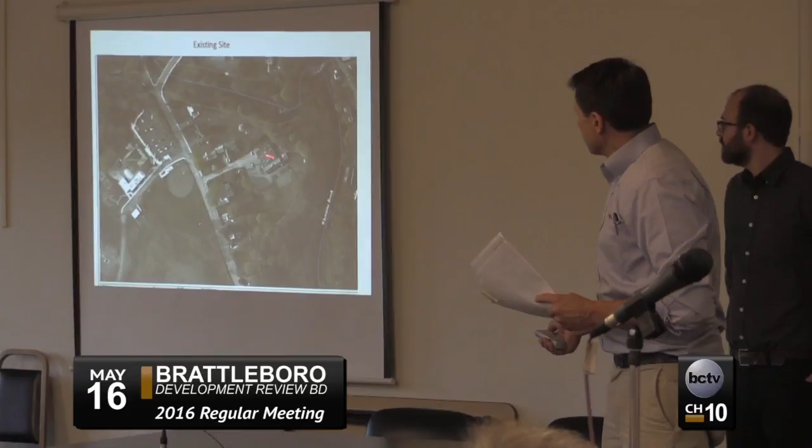I'll lead off with an overview of the project. This is taken from the Vermont Environmental Atlas, but basically we're out here on Guilford Street. This is Memorial Park over here, and the existing Winston Prouty site is here. I apologize for everyone that's trying to look through me here.

I'll mention a few elements that will come up later. For larger events or recitals, as part of their plan, they've been working on an agreement with the rec department to share the use of this parking, which is a secondary use. Their primary use is the music school, which is self-contained within their site. For these occasional events, as mentioned in the narrative, they have a history of making it work with a site that has basically no parking, so they're adept at structuring events, timing things, and working with groups in town.

Gotta point the right thing. There we go, one too many. There we go. By the end of the night I'll have this down, I do this all the time. It's a little lag here, perhaps my sensor is just in the wrong spot. Keeps you on your feet though.

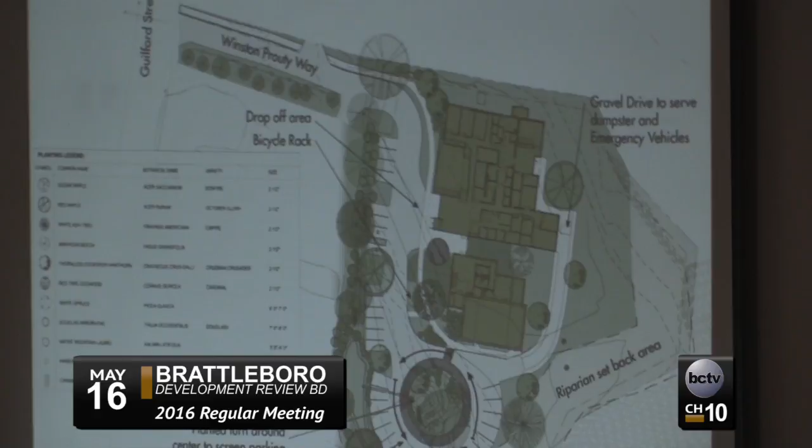Sorry, it just took me a little too long. Can you go back one? What's the number value on the bottom edge? That is 0.1 foot candles here. That was a strategy to maintain an even amount of lighting so there were no hot spots. So there's this one light that does push 0.1 foot candles over the property line towards the brook. Is it 0.1 because it's facing the other way? Yes. Where is the line where you get your first significant lighting, from the bottom? Can you show me with the laser pointer?

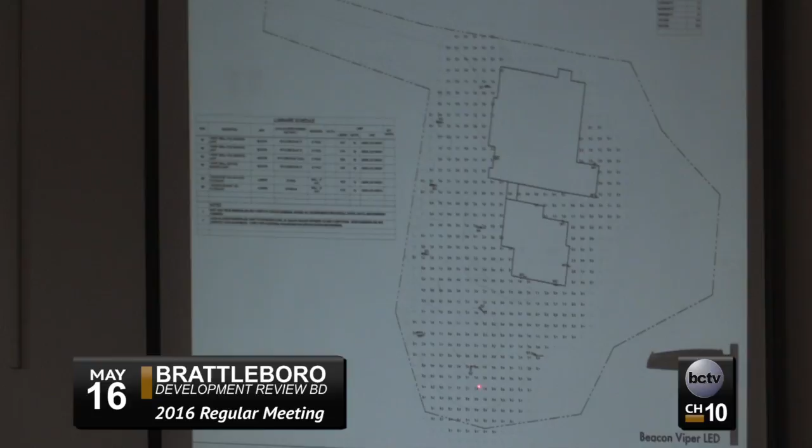The first significant point - not 0.1, but you get to essentially say 2.1 approximately right there, which is the end of the parking spaces themselves, about 18 feet from the edge.

And these are full cutoff 12-foot pole LED fixtures, so they don't wash anything up or out too far. Is it all 0.1 as you go up the left side as well, or the west side, right here?

Yeah, if you went up, this is primarily 0. Those where it turns black are 0.1s, and they're well within the property line. Otherwise, we've tried to keep it at 0 all the way along there and have no washout to the abutting properties.

On your packet too, I think the 11 by 17s are legible - I just couldn't find it quickly enough. He had gone on and I figured I ought to say something before I interrupted too far down the line. This is also to get everyone oriented, and then we'll go through each of the criteria, so we'll be talking about lighting again later.

Additionally, the lighting engineers were working off an older plan, and since then the cul-de-sac itself has actually moved further into the site, bringing the foot candles even further away from the property line.

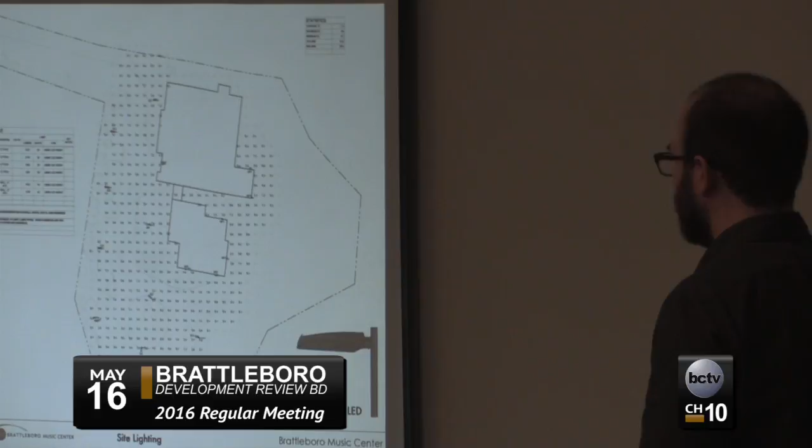So back to the planting plan. Again, the idea is to maintain all existing plantings that currently exist at the property line, and then do additional planting to enhance the buffer between the new parking and the building itself, providing both visual and sound buffers if there is any traveling sound.

I think that also reinforces not having the woody plants take over the current lawn - it's to maintain what is there, because there's a lot of support to keep that because they really enjoy it.

This current plan is the same as what was submitted, except the version you have showed some plantings in the stormwater pond, but the number is staying the same - we just shuffled them out of the pond.

So for the basic floor plan - as you can see in John's drawings, the addition to the existing building is to the west, entirely on the front of the existing building, and the addition is to the south of the current Winston Prouty building. Architecturally, we tried to keep the most sound-sensitive program in the new addition because the quality of construction is going to be much higher than what's currently there.

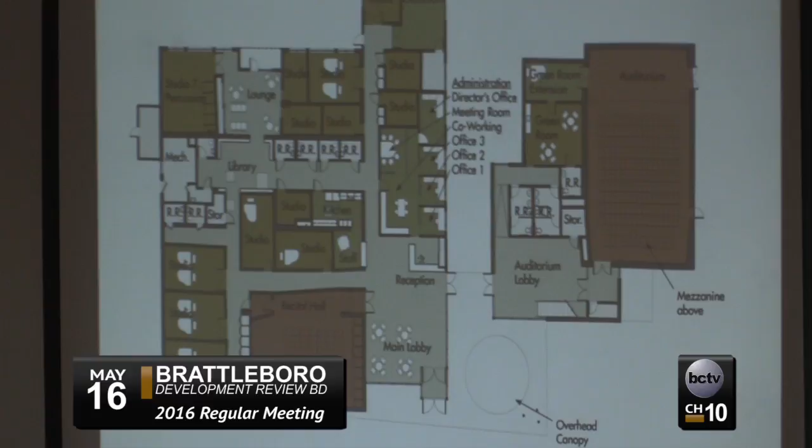I think that's sort of a little more here, I guess. So there is a mezzanine level - this is just showing that there is a double height volume towards the front of the recital auditorium that gains access to the mezzanine. And then you'll see the roof lines here.

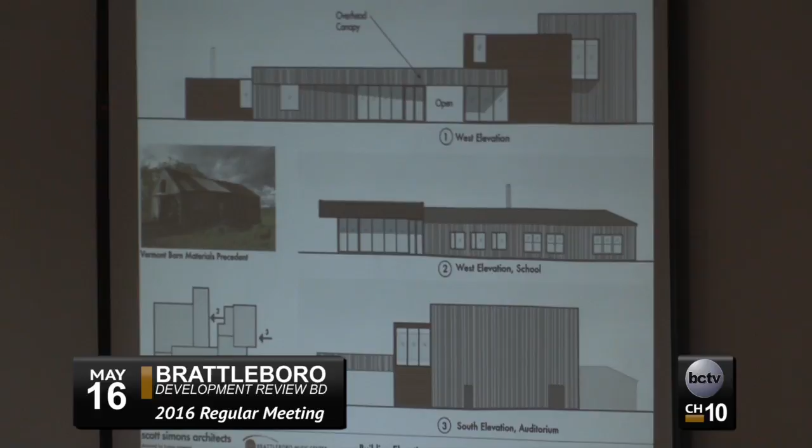As John will note, this will come into play pretty soon. Again, this is just to give you a sense of our project - we're going to look at this again in more detail once we are talking about compatibility and things, but just to give you a snapshot, here it is. This is the building, and this is the west elevation facing the parking area and the abutting property line and neighbors.

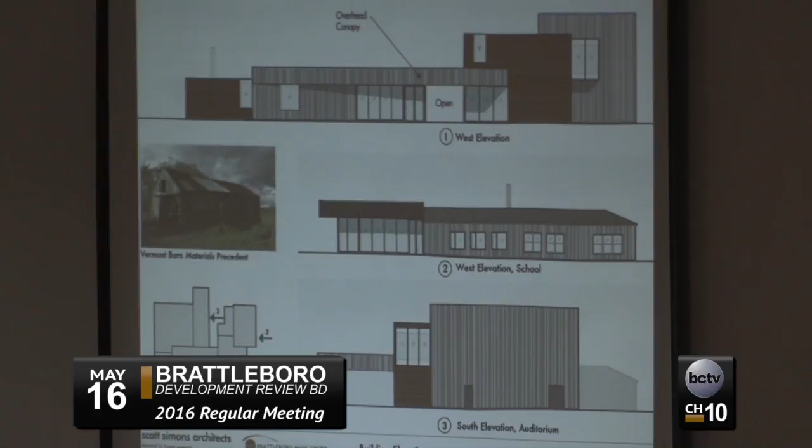The idea was really to take the formal simplicity of the typical barn and incorporate that into this new building, because this backyard program has connotations to old barns in the backyards of residential settings, acclimating the commercial program into it. So the idea is to use materials that reference the weather and change, that react to the Vermont environment—a rough sawn barn board and self-weathering metal siding, which play off each other to break down the scale of the buildings.

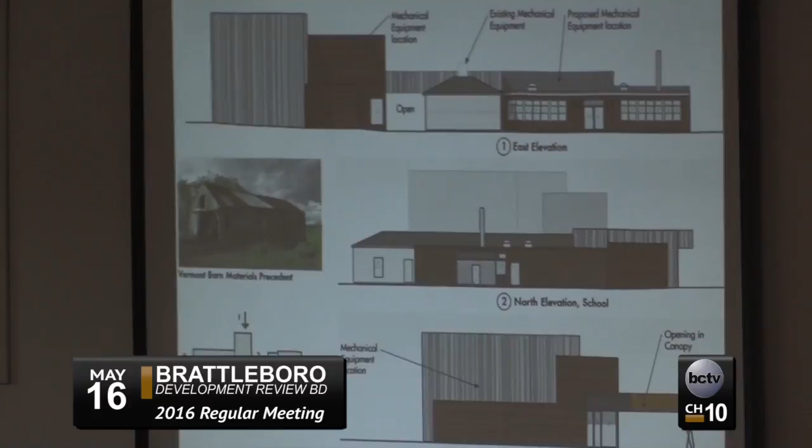So it doesn't seem large and ominous in the backyards. This is the east elevation, facing the Whetstone Brook. You'll see two notes of where mechanical equipment will be, which I'll come back to. With the new addition, there's going to be an increase in building height, which will help mask and enclose existing mechanical equipment and any future equipment located on the roofs.

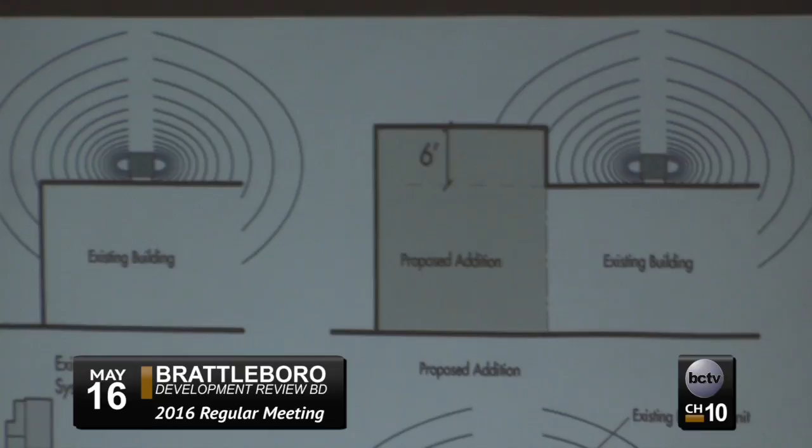Which leads me to my next part. So that was our introduction—this is our site, and this is our building that we're talking about. Before I walk through the specific site plan conditional use review criteria, there were a few points we thought we'd make right up front, because they may be the most interesting ones.

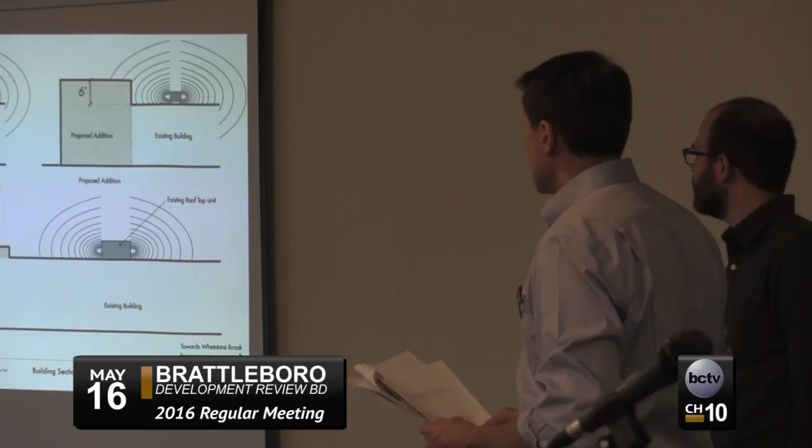One lead-off point came up when we met with the abutters—we stood in their kitchen and talked to folks—was a question about the noise associated with the HVAC system, the heat pumps and so forth that you're going to be using there. We couldn't answer it at that time because it was still in design, but Phil and his group have put together a presentation to talk directly to that. So you could go for it.

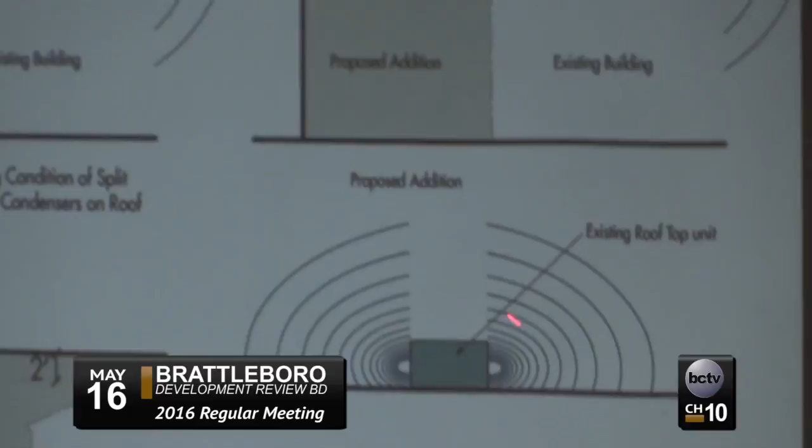So what currently exists at the Winston Prouty building is essentially rooftop units just plopped right on the existing brick building, which are these smaller units. Then on the newer wood-clad addition, there is one large unit right on the roof with no sound protection barrier or anything—it just falls off into the site.

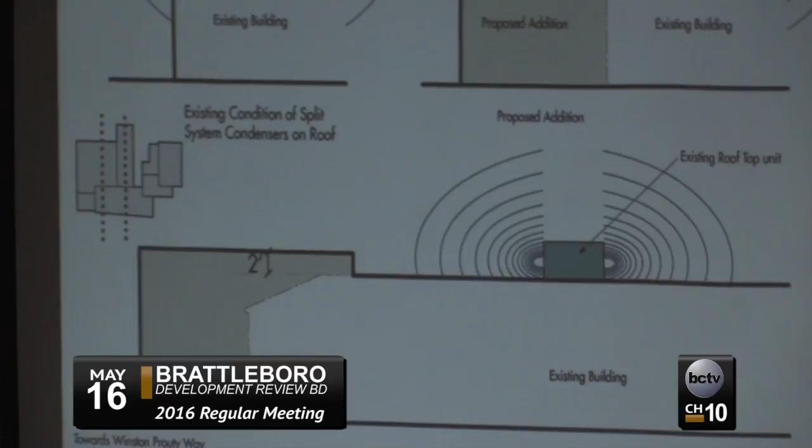With our proposed addition to the west, facing the property line and the abutting neighbors, the addition is proposed to be 6 feet taller than the existing building, which will shield what currently exists on site, as well as any future equipment on the roof. At the wood-clad building, which has larger existing equipment, it'll be slightly taller, not as large a barrier as at the existing brick building, but it'll provide a bit of a sound buffer, and more so a visual buffer so you don't see it.

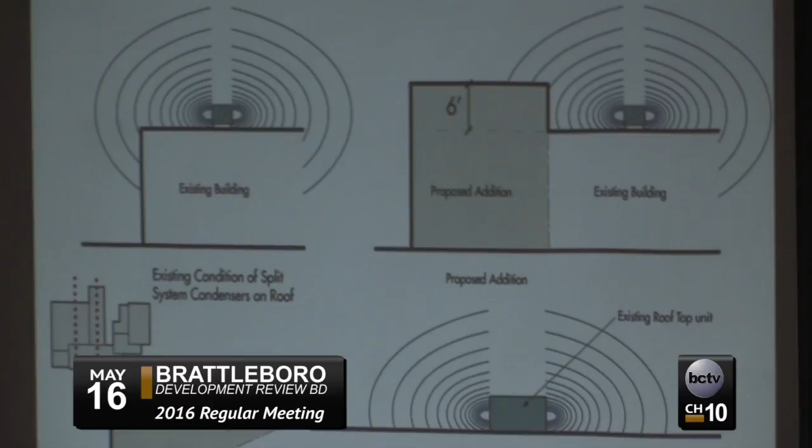Oh, sorry—are you saying there's going to be a screen from the south on the existing unit in the lower picture there? No, I was just depicting towards the west that we're building up and out with that one. Okay, what about to the south?

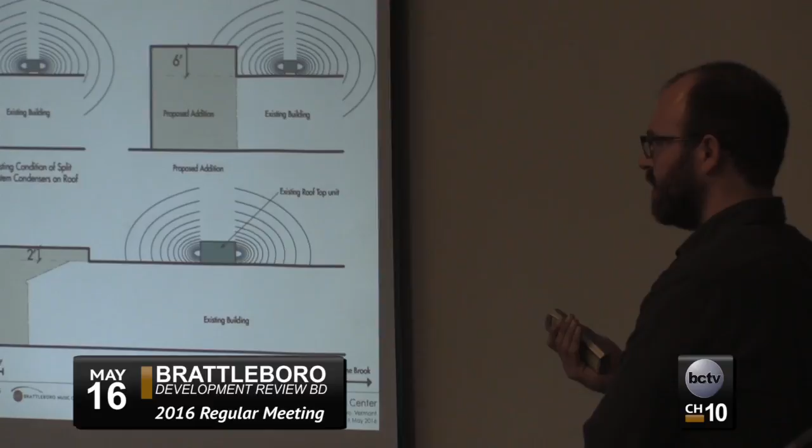To the south is the heavily vegetated hillside and the Whetstone Brook itself, which cancels out a lot of the sound from the existing units. I think during the neighborhood meeting they said there's currently no sound issue from the closest properties, but they were concerned that with the addition of the recital auditorium and the expansion, there'll be more mechanical equipment that'll add to or create unnecessary noise. Okay.

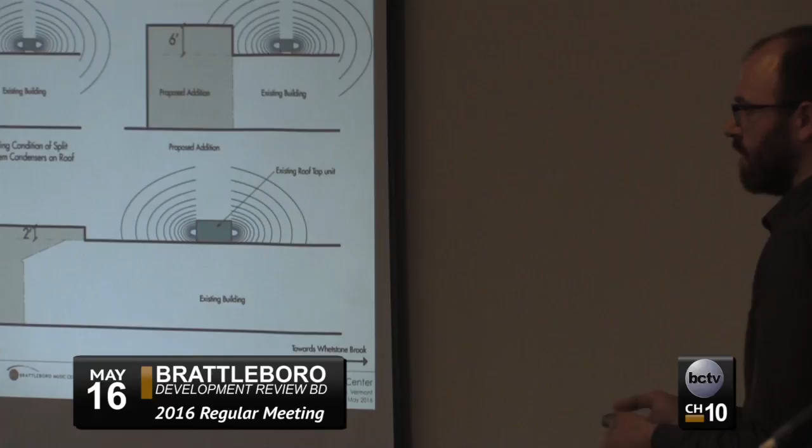At the recital auditorium, the general location is behind the double-height lobby that has the stairs to access the mezzanine, so there's a very large vertical 15-foot buffer between the mechanical equipment and the abutting properties to the west. There have also been discussions with our acoustical engineer about adding sound attenuation screens around this equipment to the south, since the first priority is to not let any sound into the auditorium itself.

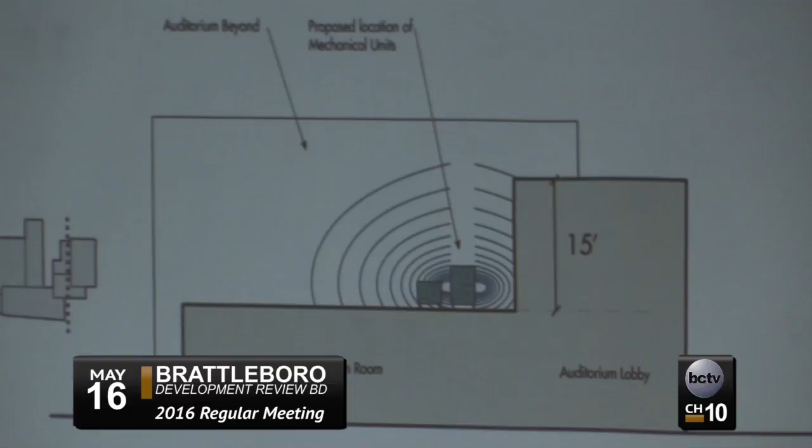So just to give some idea of what sort of equipment could be used, we just broke ground on a 32-bed dormitory, similar size, similar scale, similar need to separate and zone equipment. This is the sort of line we used, a split heat pump system.

You can't really read it, but I noted what the decibels are, and there's two levels. The sound coming from the equipment is louder during the winter than during the summer. Out of this whole range, we mapped out the worst case scenario, 58 decibels, measured in a soundproof box approximately 12 feet by 12 feet. There's a formula to figure out the degradation of decibels along a distance.

As a rough analysis, in the winter, the worst case scenario of 58 decibels at 87 feet, and then at 187 feet, which is the closest neighbor here, at the property line - this is uninterrupted, doesn't take into account any plantings or vertical buffer, just uninterrupted sound - you've got about 35 decibels at the property line, 28.4 at the closest abutting neighbor.

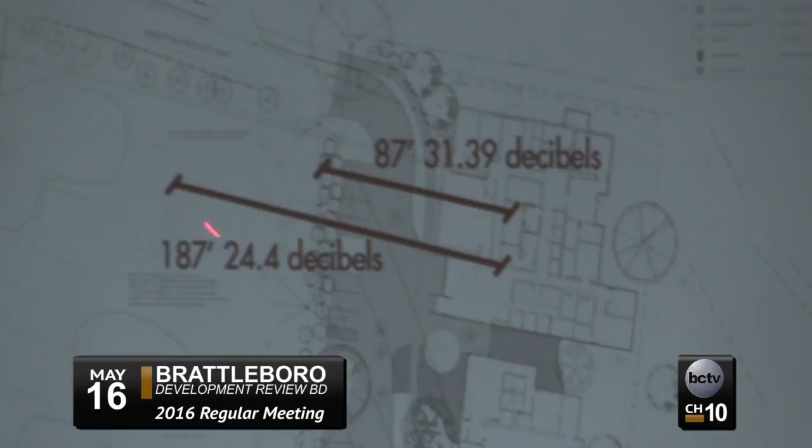During the summer, it decreases. They run quieter during the summer when they're cooling versus heating. Again, we're at uninterrupted 31.39 decibels at the property line, 24.4 decibels at the closest abutting neighbor.

Additionally, we've got the planting. Planting does help break down decibels as it passes through. We're not going to say there's going to be a 5 to 10% reduction, but we are using a mix of trees and shrubs as the visual buffer, which also aids in the acoustical buffer as well.

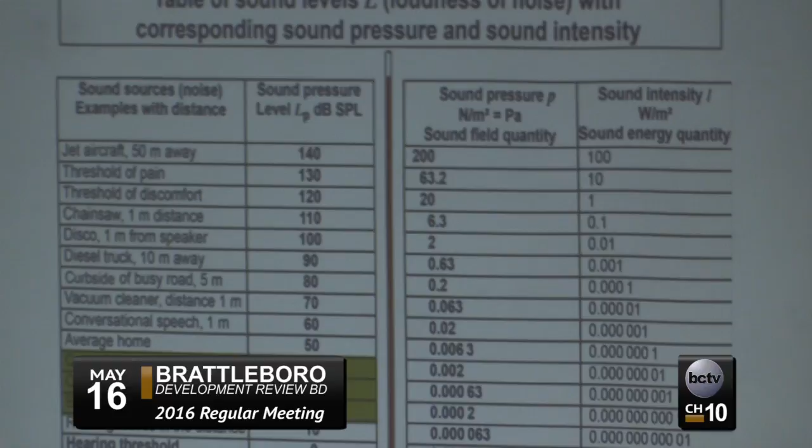So what does that mean? At the property line, when it's in the 30 decibel range, which is uninterrupted and doesn't take into account the vertical buffer of the building and the plantings, you're right around the sound level of a quiet bedroom at night, quieter than a library, a little bit louder than the background noise in a TV studio. It's very, very quiet, and that's before taking into account the vertical buffer and the plantings themselves.

Relating it to the regulations, in a residential neighborhood from 7 to 10, there's allowable 55 decibels, and then from 10 at night to 7 in the morning, allowable 45 decibels, measured 1 foot beyond the property line. So we're well below that. The idea is really using efficient equipment environmentally, which is good practice, also results in much quieter equipment because bearings are better, motors are better, there's less resistance, there's less vibration.

Okay, great. Thanks, Phil.

So I have just a couple more points, but just to wrap that up - our initial position was this is not an issue, this is modern equipment, modern technology, and so forth. But the BMC specifically asked that we address that because it was brought up, and the BMC is trying very hard to be sensitive and to be a good neighbor and wants to set that precedent now and plans to do it going forward. So that's why Phil took the time to go through that. Basically it's quiet, and the new stuff is good and it works, but by putting some numbers to it, that takes it to another level of demonstrating.

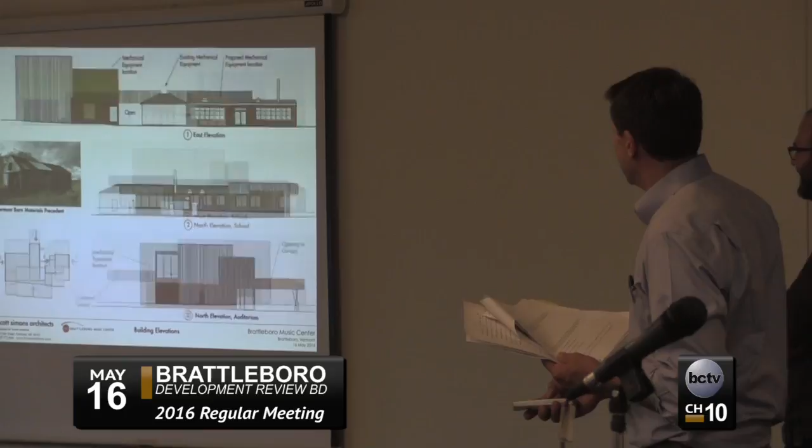Yeah, I guess we'll go back a little bit further. There it is. So again, just to restate before I start going through the criteria...

This is one area where the BMC's position is don't fix it if it ain't broke, kind of thing, in that there's good lawn, there's a playground area over here. Let me help you get oriented on this, just so when we start talking about that specifically.

Let's go back even further. So we are talking about this here, the 50-foot riparian area. I'm speaking to staff comments on the question of a 25-foot setback. This is the area in the picture you were just looking at with the playground. The existing playground was here. I was standing here when I took that picture, looking over this way. This is the edge where that fence is, and the playground area was here. So this is the strip that the BMC would like to remain lawn, and over here where they pull out the playground equipment, they would propose to return it to lawn as opposed to playground, as opposed to a requirement that it must grow up with 25 feet of woody brush.

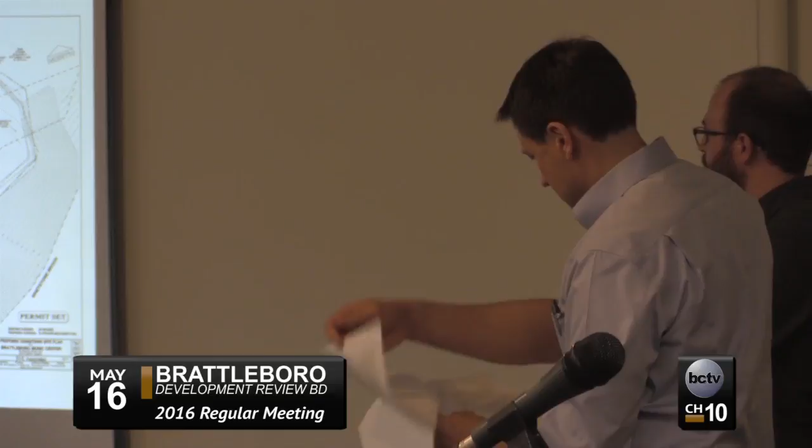Okay, let's see, that was the only thing. Yeah, no objections to the fire department's requirements there. I'll use yours, which I don't think I need to read through all those. And similarly, I don't think there was anything else in there that we saw that was in any way objectionable, other than just as I've mentioned a couple times, the question about the buffers, the only question mark that we saw from the staff comments.

Okay, so now that we've been going at it, it may be time to run through these criteria. I'm just coming right from figure 4.3 of the zoning, the development review criteria for, in this case, a shared site plan conditional use approval. It's site plan approval because we're building something, conditional use approval because the use, as was previously found, is a music school which was previously determined to be the same as a grammar school, which is a conditional use for this zoning district.

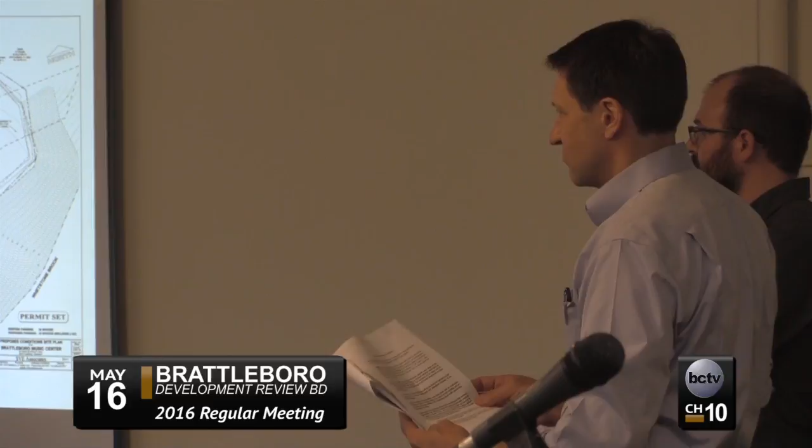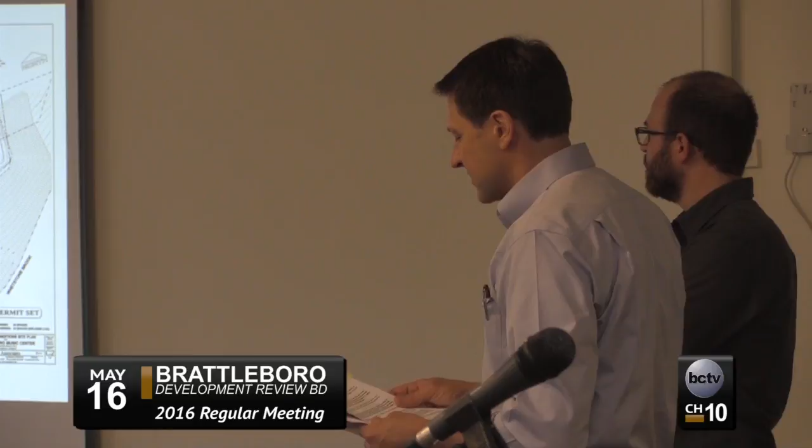Okay, so compatibility. As stated in the narrative, I'll try to be brief, but please ask if you'd like more detail. The proposed land development will not... well, I'll read what I wrote here. The residential neighborhood zone is comprised of high to moderate density residential neighborhoods; walkability and proximity to public transit, neighborhood stores, schools, parks, and other amenities are among the characteristics common to the residential zoning district. This project is fully consistent with the town plan's land use goals of reinforcing a compact, mixed-use development pattern that promotes walkability.

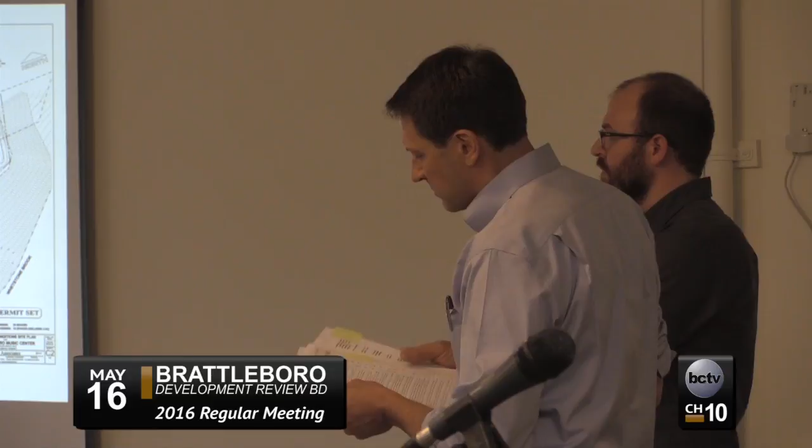Character of the area. The requirement is that the proposed land development will not alter the existing or planned character of the area as defined by the purpose of the applicable zoning district. As I just mentioned, and as Phil talked about when discussing the building, the building has been designed to fit with the character of the area. Maybe this is a moment where you can make sure that we cover that.

Another site plan at the end would have been helpful. Oops, let me just steal your thunder here. Oh, that's fine. Okay.

Maybe just again to address both compatibility and character of the area. Phil, if you want to take a moment to talk a little bit about how the building fits within the site.

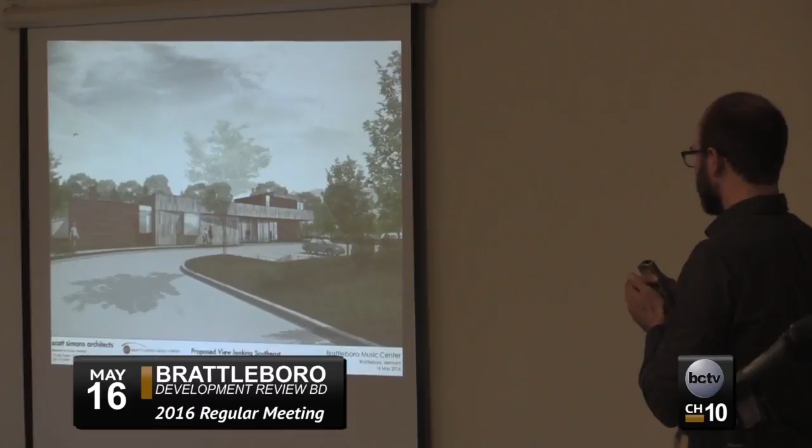So what we plan on doing is, here's the addition, and there's the taller portion of the recital hall, and that will screen all the existing equipment and any new equipment. You can see how the very simple forms of two distinct materials help break down the length and breadth of the facade, as well as help organize the site as far as where you enter the building, which is framed between the two larger weathering metal boxes and under the large canopy that frames the public entrance to both the auditorium and to the recital, the music school.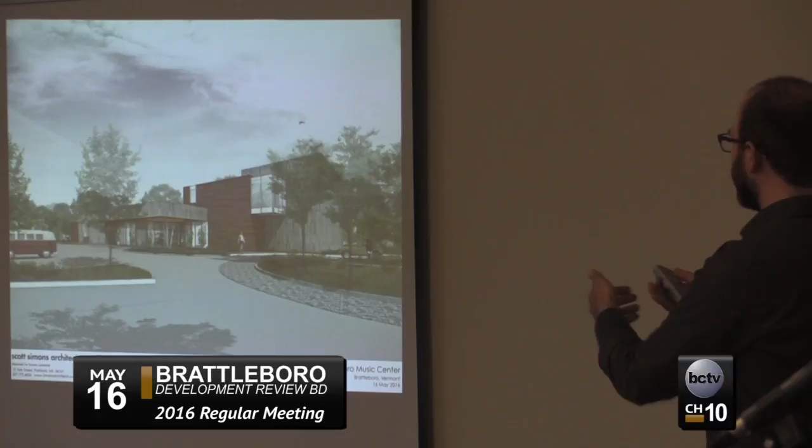And the auditorium with a double height volume that has access to the mezzanine level, as well as a double height lobby space. The strategy of bringing those spaces forward in front of the auditorium, and bringing the lobby areas in front of all the studios in the music school, helps buffer any internal noise happening during any recital or performance, having that space break the sound down.

Good, good. Okay, so again, a focused effort on fitting it into the neighborhood, and not just bringing something from outer space in here, but trying to look intelligently at what's there and what makes sense.

Yeah, actually the site plan really evolved through a good, close collaboration between both SVE and Scott Simons. We went back and forth trying to figure out the least impactful way to get emergency access and the appropriate number of parking spaces on this site without having excess impervious surfaces. And with the riparian buffer to the southeast, it really came down to fine tuning where the auditorium can be and where vehicle access can be. This was really, we felt, an exciting plan that evolved out of it.

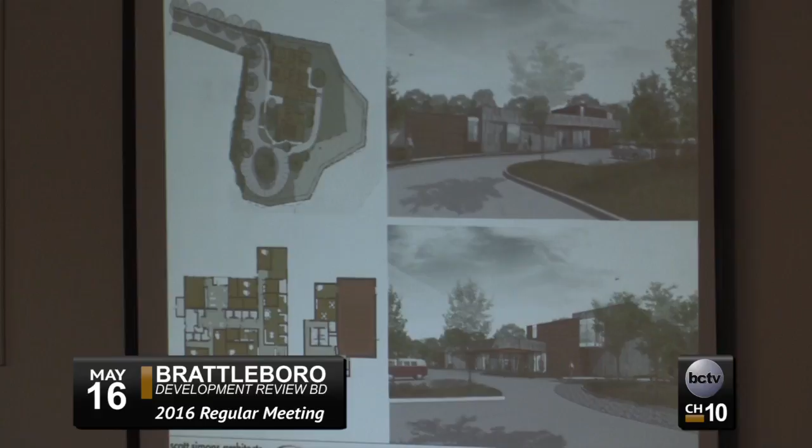Okay, so moving on to traffic, I'm going to skip back to something that shows the site plan. And you will get to see this apparently many times before we are done tonight. So there we have it. So, oops, one more time. Again, in terms of...

I'll blend traffic and vehicular access and circulation here. Of course, Guilford Street, cars come in, and it's two-way traffic through here, and then we have one-way through here with parking on the side broken up accordingly.

Okay, and then speaking again specifically to the traffic question, for the base case, and also a little more information on BMC and traffic and their operation: they have a busier period which tends to mirror the school year, September through June, and then a reduced and slightly changed program in the summertime.

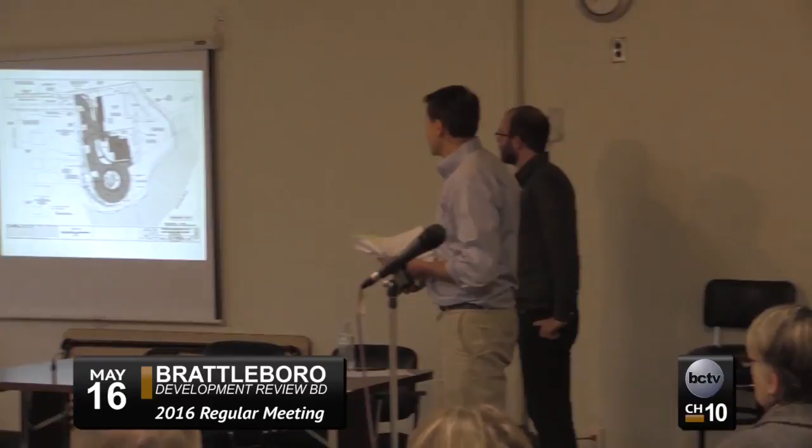Reverse that, 60 for the orchestra, 90 for the choir. Okay, I will reverse that then. 60 for the orchestra and 90 for the choir, plus or minus. And then for the chorale, 30 members.

But the point being that limited use at off-peak times, I guess, is the essential point. And why that they would go to all this effort if they needed a parking lot with 100 spaces, then they certainly would have directed us that way, hey, we need this.

But it seemed like the ideal opportunity to mesh with what the new zoning ordinance was trying to encourage folks to do, which was to utilize community resources at times when they're not getting used otherwise. And so that's why they have become very comfortable with 34 parking spaces.

And just a little more detail on that. That number was worked out in consultation with Brian. Basically, what we did there was consider the 225 seats for the auditorium as the controlling number to design around.

And per the zoning ordinance, the ratio for required minimum parking is 1 space per 6 seats. Yes, righto, I knew what I meant to say.

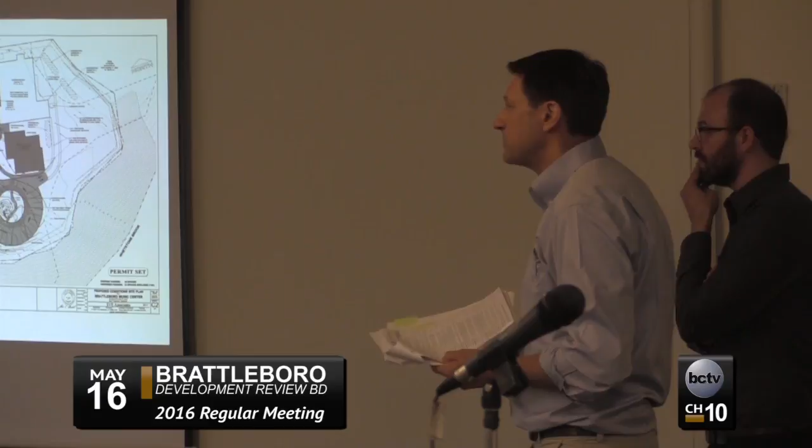Okay, so can I jump in for a second? You bet. Is there a formalized agreement with the town at the moment, even if it's not written, in terms of onsite parking?

Mary has an email from Rick Carol basically stating that they're in agreement that they can work together at off-peak times and times when the parking is available to schedule parking. And of course they've been talking about this for several months now.

And what's the definition of off-peak time that everybody's using? Well, I think, in terms of peak, I'm thinking of 7 to 7:30 in the morning to 9:30, typical rush hour, people coming and going to work.

Which, for the larger events here, the folks that are going to be participating in them do work, so they would generally not schedule them when they're trying to get home from work. They schedule them later, more like 7 to 9 p.m. at night, or on Sunday, so that it's self-limiting by the nature of who attends these.

In terms of the area traffic, the other traffic that's happening in the area. And then with respect to the rec department, they of course have any number of larger events in that region of town, which become the icebergs that BMC needs to steer around effectively.

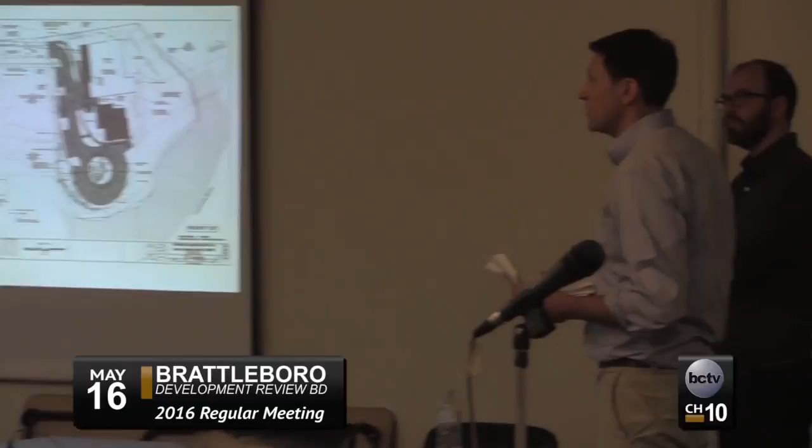In the same way they've done for years, as part of that program, they would come up with a solution—carpooling, or an invitation saying you'll be parking here, potentially the farmer's parking lot. There's other parking in the area without cars in it much of the time. That's at the very heart of what the zoning is trying to get to: working out a solution rather than just building your own so you don't have to worry about it. It's been part of their history, finding ways to make it work. So they're comfortable they have flexibility within scheduling their events and the nature of their events to coordinate with available parking.

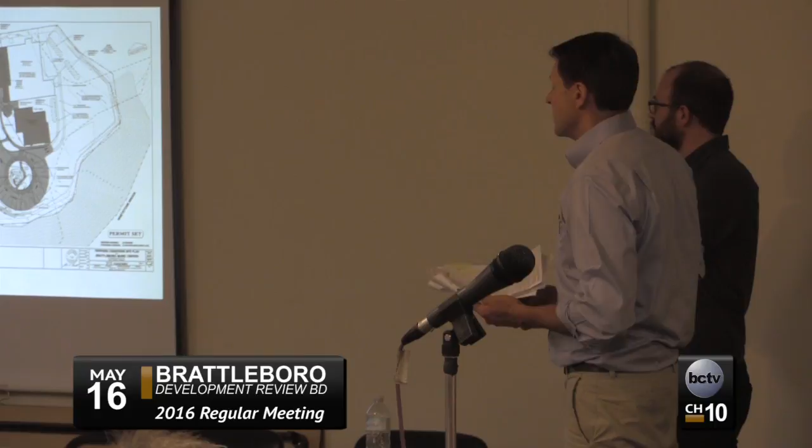If you increased on-site parking, you'd also increase erosion going down those slopes. It's a pretty easy site in terms of stormwater, because we're sitting on well-drained gravels. I did test pits for the design of this stormwater basin—it gets a little more sandy for a layer, then you're sitting on gravel. So there's not a current issue, and we've created a nice system that disperses it, both in the cul-de-sac, in an infiltration basin, and multiple rain gardens, which I'll get to.

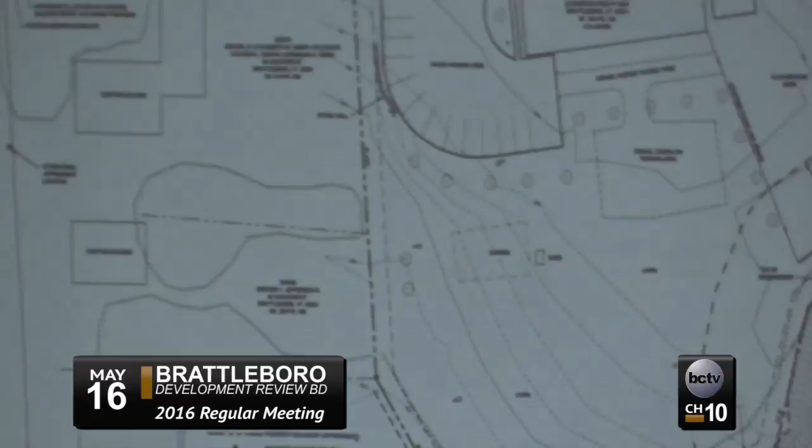Are you able to tell at night whether this parking lot design will result in headlights shining into the neighbors' properties? You can see, from a simple standpoint, cars are pointed this way, all the way down to here, then they turn a bit this way. For this space, even here, the spaces are pointed this way, and of course we have screening, but there's this little block of space. These up here also, but there's thick vegetation there. What type of vegetation is that? Let me scroll back to show you.

But that's basically going to stay the same there, is what you're saying? Yes, and those top three spots will be roughly equal to the spots you're pointing to? Yeah, that's right. There's a rain garden that goes here, and their challenge is to do no harm—don't take out something good just to plant something else. So that's what you see in the landscaping plan: they show some more planting, though it's pretty tight there already. As you go further this way, I don't think I have a perfect shot. Could you go to the site plan?

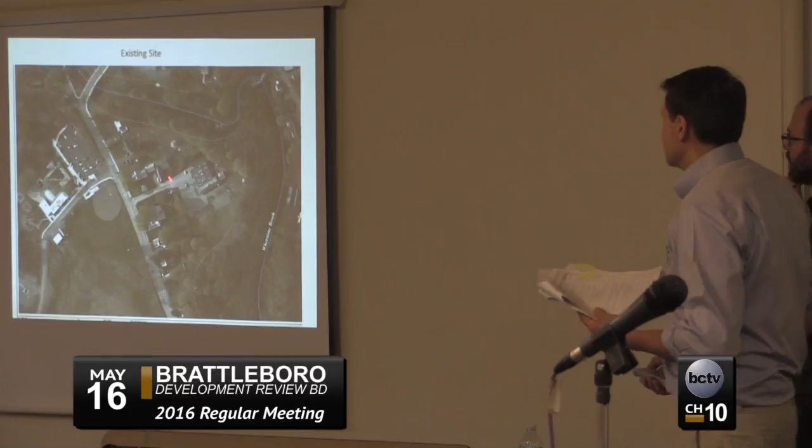And so it's not necessarily that different, to the extent that we believe we've succeeded at screening the effects of the actual cars parking. Also, the nature of the activity is not, until they branch out, budding rock musicians that are looking to hang out till late at night and so forth. The very nature of what they're doing tends to be, I guess I would say, a more refined experience, perhaps.

No, my concern isn't the traffic necessarily, it's the headlights. And especially in winter, when all those deciduous trees will have no leaves, and the headlights are going to be facing toward the existing housing.

One strategy with the scheme we developed is we've essentially eliminated an east-west driving lane. So currently when cars park out back here in this dotted dirt lot, when every single one of them leaves, they drive east-west. All those headlights are shining into the backyards of the abutters here. And so what we tried to do is essentially maintain this area, and that exists.

And then expand on that, but eliminate, by using the cul-de-sac this way, instead of bringing parking back here with another east-west drive lane where every single car leaving would point directly at the abutters. We tried to bring them in and limit the headlights pointing into the properties to only the cars that are parked there. As folks leave, the majority of these headlights are blocked by the building this way. We targeted the larger plantings that currently exist, and back to the status quo for the north-south drive, exiting through Winston Prouty. Part of it is also adding additional plantings to the northern end of the lot to break that down more than it currently is.

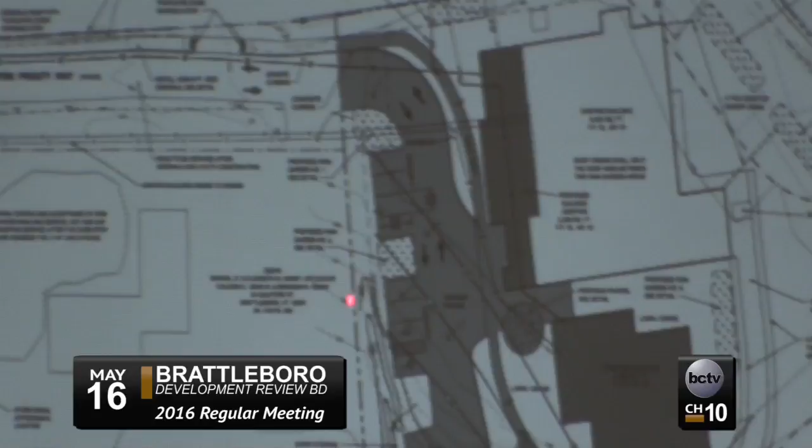There's a rain garden there. They'll probably push some in here, but I would think likely they'd come in and push it up. There's really no other way to do it, right? Unless you bring in a bucket loader. Yeah, or you could try and push it into the rain garden until that's full, but I would think likely it comes in on an angle, plows it, and then squares up.

Where will you push the snow from the cul-de-sac there? Again, to the outside—once you get around to this side, there's a great big spot, no problem. Or if you come straight on down through here, this goes right into the cul-de-sac. This is actually a forebay, so it is a low spot, to the extent that they can sort of wing the first part of it, if they use an angling plow into there. Also, over here to the far end of the infiltration basin, it can be pushed. The truth is they can go all the way around the edges too.

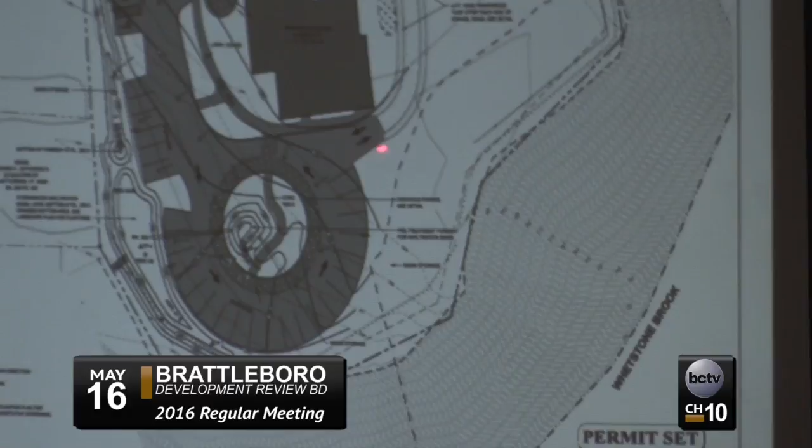There's room there. Is it going to roll down into or melt down into the Whetstone? Well, the Whetstone curves away here, so here again on these well-drained gravelly soils, it would take an unusual event for that to happen. But also just the way we have the site graded, it's going to—from the parking lot here, anything that goes in here in the forebay goes into our basin for infiltration. Anything that comes over here on this side goes directly into there. Anything pushed up against the bank here—you can see this drainage ditch is here, so drainage shoots off here and comes down like that. So if they put a big pile of snow up here, this is kind of the crest of the hill. Again, for that spot on those soils, likely it's going to melt slowly and just soak in. The soils will accept it.

And you're going to have details on that showing that it will accept it? Well, I'm concerned that that's going to be plowing off parking areas and is going to put snow and other things into the Whetstone.

Well, of course, this portion of things is very much like the existing, and we capture all this. This is all graded into here, and this is a great big infiltration basin designed just for that, so there certainly is a lot of capacity here to accept that. The center is the ideal place, and that could become an operational agreement because it's a low spot, as a forebay there. This is just my thinking, but unless plans are made for it, I wouldn't be particularly comfortable with a lot of snow plowed to the backside. Right, well, actually, I think the plans pretty well address that, and that all this in the center, this entire area here, so you would capture it.

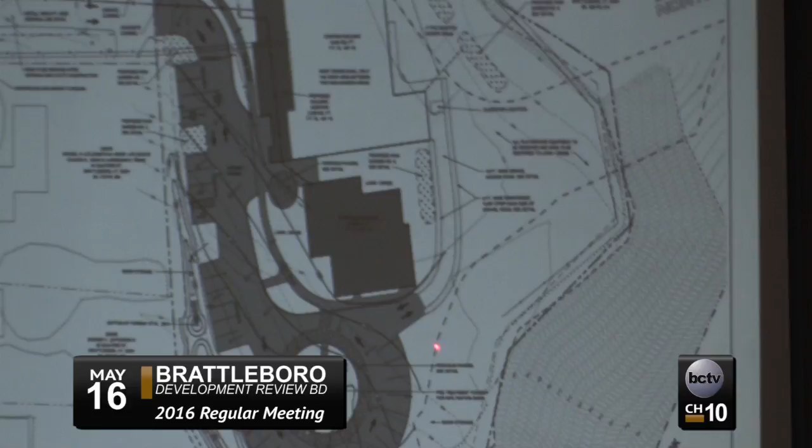Absolutely. The grades themselves—right now this is basically a flat area—to ensure that, it would be a tiny change to create a berm right here, for example, to ensure that the snow melt just soaks in. Very simple. It basically will do it as it sits, because you saw the picture—I'll back up. Yeah, I've been there many times.

That's exactly what we would want and expect to have happen, is for the snow to soak right in, into those soils, as they sit.

The other thing I still have some concerns about is the traffic, more so than the headlights, because you've got 34 spaces, and chorus and guests come in to see a performance, all trying to get in and out of there. It seems like it could add quite a bit of congestion to the road at the times you're having the events.

My response to that would be that the group will be a knowledgeable group who will know the site, will know the space. If you're coming later to an event, are you going to drive by a guaranteed parking spot at the Living Memorial Park? How many times are you going to go around the loop before you realize, I'll just park at the park? That was part of the idea behind limiting the parking, to limit the impact. People adapt and find other ways, which they can do by the nature of their organizations, which they've been doing through their history.

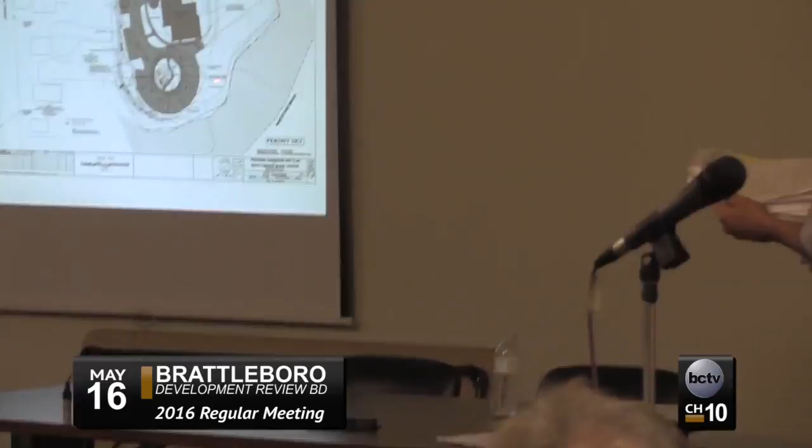And with the berm, it would never do it? It would be a very extraordinary event if ever that happened. Practically speaking, it's the highest point on gravelly soils. All you'd be looking to do is not have a short circuit. I don't want to belabor this. I'm sorry, I'll let you move forward. I get it, yeah, okay.

So parking and loading, okay. Pedestrian access and circulation, I think we probably covered that in terms of the sidewalk, which includes the sidewalk and so forth. Landscaping and screening, we did touch on that some. Phil, do you have any more points you want to make on landscaping and screening?

Not unless there's specific questions on species or... Is the stuff that you're adding on the western edge, near the deciduous things that Ms. Hasegawa was concerned about, is it also deciduous?

Let's get to some visual aid. There we go. I thought you were on the picture, a giant caterpillar there. That, by the way, is the top of that knob. Right. So there's kind of the two levels.

On the shrubbery level, looking at it, it's a mix of Douglas arborvitae and native mountain laurel, and then there's a mix of trees that'll go into this section, which is primarily going to be white spruce and red maple.

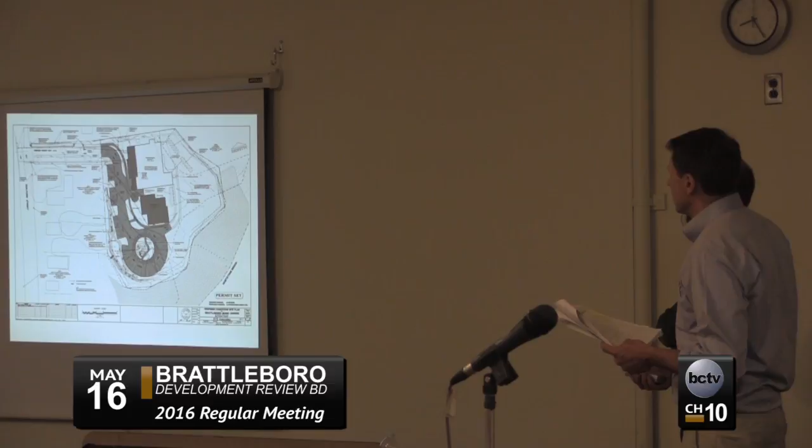No, we think it will be only an enhancement, both for the community and for a part of town that already has any number of large events at the park, and is very much part of the fabric of the town from the people that are already involved with the BMC.

And then I guess lastly, municipal plan and laws - again, we're, as we've presented, in compliance with municipal plan and laws. And those are the site plan and conditional use criteria.

Previously, from the sketch plan review, there are 2 waivers associated with this, which were concurred with - I believe that would be the term from the sketch plan review. The 25% increase in the base building, and - is that the accessory roofs? The accessory is 10%. Okay, and then the base building was 25%. Yes, okay, which are in the record.

Just to summarize the items that we are here tonight requesting: site plan, conditional use review, and those waivers.

We have none at our property line. Oh, you're north of it? Well, yeah, this is open right here. Right now - no, yeah, we are south of it. The picture they have is in front of the Henry's house, which they've built up, but we don't want to be boxed in and feel like we have this row of hedges or trees that fill in, but we like a little bit of planting accordingly. But it sounds like it's been addressed in some of the material, the species, the kind of plants.

Can you put up the planting plan and show what's going to be there at that particular point where his - yeah, that one.

So it's hard to see. I think your property opens as the opening towards the back here. Yes, and that's the area where Austin was at the neighborhood meeting. He works at Scott Simons and is a registered landscape architect, and these have been moved and adjusted from those comments to the best he felt suited.

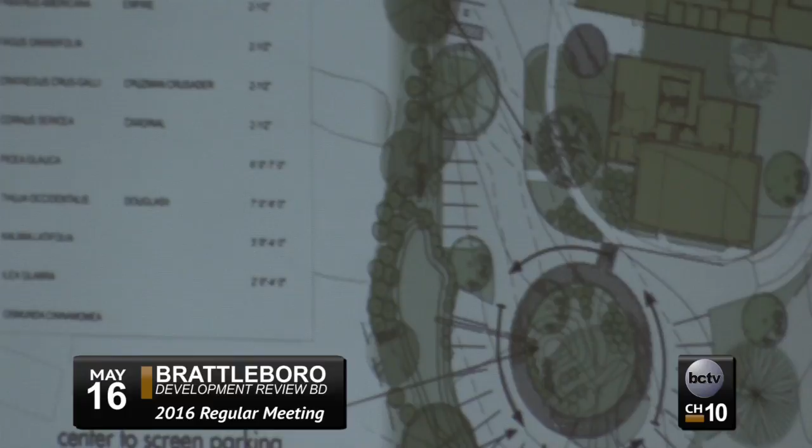What are those plantings currently? Are they going to be above headlight level, thick, and evergreens? Yes, something with a good mix. I love evergreens, but a whole line of them would feel like a hedgerow, which is a strategy we are certainly supportive of avoiding.

So will it be symmetrical? It'll be asymmetrical, a mix of Douglas arborvitae and native mountain laurel, with inkberry, a lower lying shrub, mixed in. That was his direction, to not block that view, and to spread the taller trees that will fill in outward, beyond the sight lines towards the hill in the background.

Just the last question - we are the lowest spot, so I was listening to the plowing, and that may be close to the southern end of our property. I don't know who's going to plow, but it seemed like we are one of the low spots where if there are a number of storms back to back, we could see some high piles.

Oh, visually - I was all ready to address runoff, that's my bread and butter. Fair enough, if they did pile a big pile of snow here, the plow guy loading up coming through here, it's going to be easy to just drop that right in the center of the cul-de-sac. Granted, there'd be a pile there too, but we'll have a lot of places you could put it - some here, as he comes around, this could end up over here, and so forth.

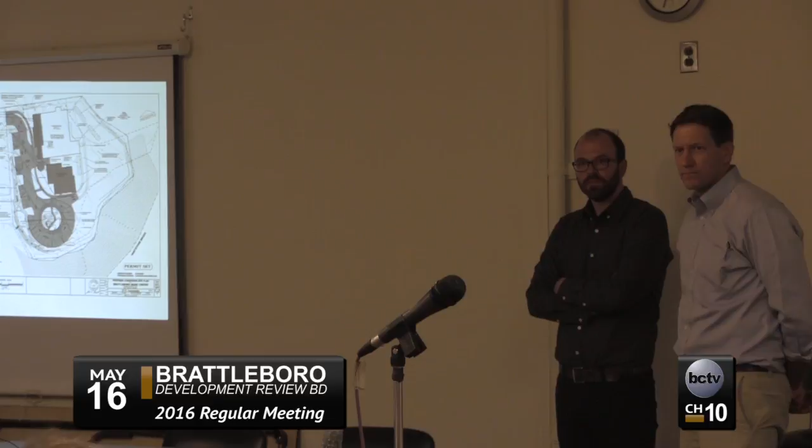No, I appreciate that. I mean, just the impact of car doors opening and closing, and the human traffic - we do our best, but it is going to change. We're excited about the music, that's for sure, but the amount of people coming and going, and our normal volume...

I'm concerned. Sure. Thank you, Mr. Brewer. Yes, I'm sorry - it's just so that those who can't be here can hear.

Hi, my name is Wendy Levy. I'm a member of the press. I wanted to identify myself as such, but I'm also here as a neighbor. I live near the proposed site, and my concerns are with construction. Is this the appropriate time to ask construction questions? Yes, can you just say where you live? I'd rather not, because I'm a member of the press - I'd rather the public not know exactly where I live. I live on Guilford Street, and I can tell you that's more than enough.

So during construction, what are the hours that construction is going to happen? I think typical would be like 7 a.m. to 6 p.m., but lots of construction projects are limited - they don't want to stretch it out or have it go on any longer than that. So probably a typical 7 to 6. I was wondering if there were any ordinances from the town about when construction is allowed to happen.

They are, but they're outside of our jurisdiction. So when we give them a permit, it has to do with how their design deals with things that, for the most part, either affect the public or their neighbors. And while construction does that, who would get involved if they were pile driving at midnight?

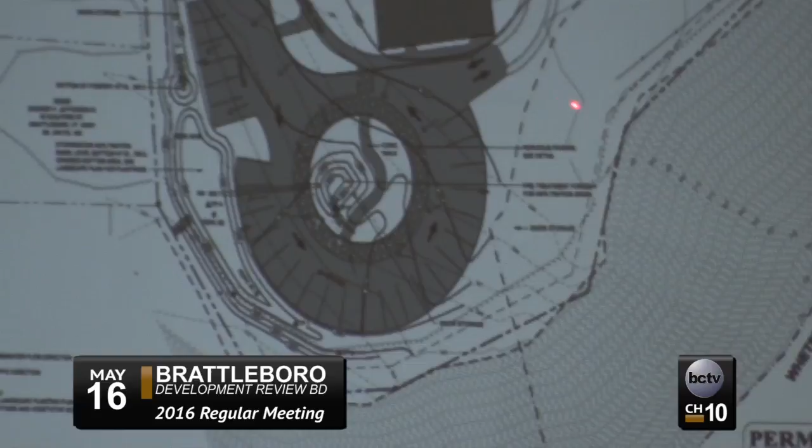And what I would still like it to do is have it open toward the way I'm going here. You're an engineer competent to tell our zoning administrator this berm is going to do this, yes, exactly right. So all we would do is ensure there's a berm on this side, so that if it ever does fill up and flow, first we'll have a big area where it would just sit and infiltrate, and then if it can flow, it has this great big wide flat area we're using for stormwater treatment coming off this road anyway. The ideal scenario, send it over a wide flat grassed area. So we'll put those together, and it's entirely easy to do.

There was one other thing in here that you didn't talk about, which is these level 2 car chargers. Is that fine? Did you not bring it up because that's something you're prepared to do? I noticed it wasn't in the plan. Maybe you could direct my attention to which number that was.

Number 10. Are we reading two different things? I think we're reading the staff memo. Oh, you're reading the staff memo, okay. Have they seen your draft?

Let me give you just one second. When I said we would include the other conditions, what Brian has done in our draft decision, if you go to page 7, is he's incorporated the suggestions of the fire department. And there's some general language things in there. You need to get your state permits, which I'm sure you already know.

And they all looked fairly perfunctory except for that number 10, which I don't think you're required to do yet.

Yep. They need to do the conduit, is that the deal? No, this is actually a worse situation. Given the actual amount of parking that would be required if they did that maximum, they would be required to have a couple of chargers. Oh, okay. The standard is that if you have 40 spaces, then you have to start providing them.

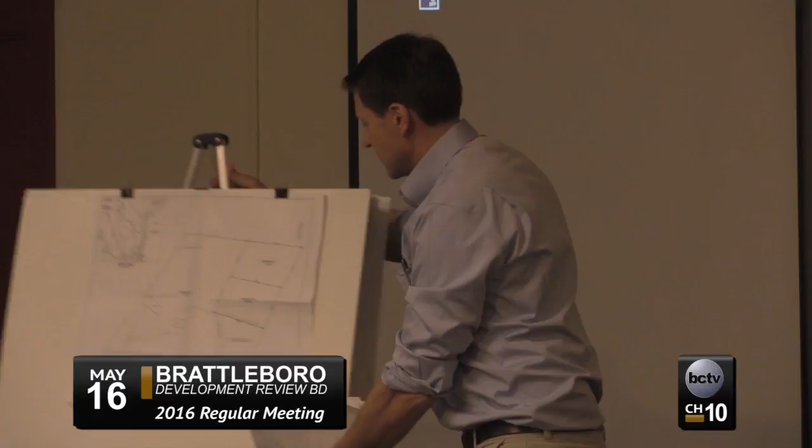And hopefully a good deal more simple. I think you all have a copy of this plan. I'm trying to position it so all can see. We do. It's the camera that needs to see. Right, exactly, so if you've got it, then we'll go with this.

I'm here as the first step in a subdivision process for sketch plan review, to determine if it's a minor or major subdivision. The nature of the project is a 3-lot subdivision, taking the existing 8-acre lot and creating a 1.5 acre lot parcel, basically in full compliance with the zoning ordinance.

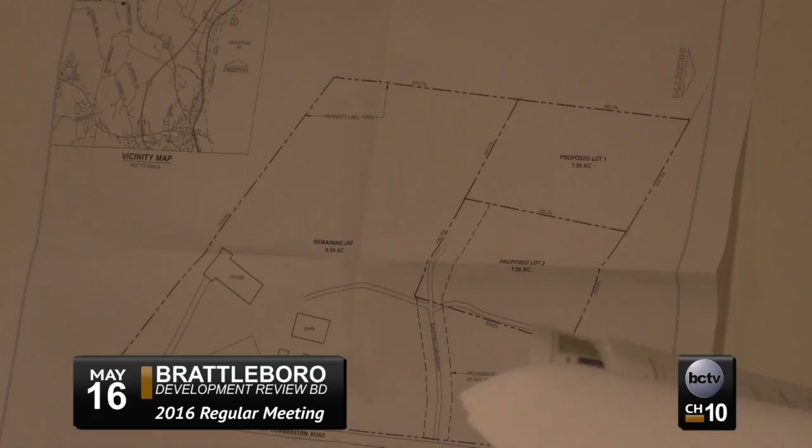One item I should point out on the application is that there's a typo on the frontage listed. It's listed as 72 feet, but it's actually 872 feet, which, reviewing the plan, you'd wonder where 72 feet comes from. The proposed access for the lots is via a 50-foot wide right-of-way, as allowed by the ordinance.

Just another note or two, not to make it overly complicated, is this does need to comply with the rural subdivision requirements. That was part of the preliminary process, considering where there are prime soils. There are no prime soils, there are statewide soils.

Also configuring... There are what soils? Statewide soils, which means... Oh no, for the purposes of Act 250, prime is the best. Statewide still requires consideration, and then others, not prime or statewide. Okay, it's the basic categories.

But again, the way this lot needed to be laid out to address the requirements in the rural subdivision section of the zoning effectively calls for you to look at how you're configuring this, so you don't plant houses on top of the best soils. And similarly, to not create or change the layout of a lot such that the remaining section, the remaining 5 acres, would not function still as a rural or more farm-like enterprise. To the extent we're able, that was the intent: putting the 2 residential lots on the side, tucked over to try and keep as much contiguous as possible.

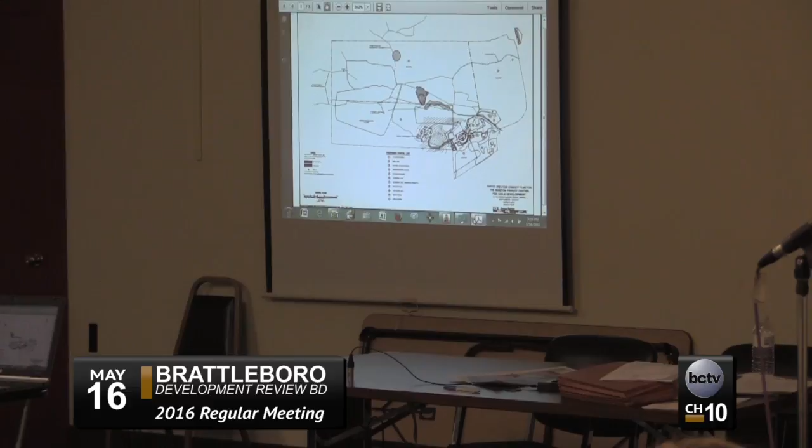We are planning, however, to limit the planned unit development to an area that will not include the Wheeler House, which, if you're familiar with the campus, is a house with direct access off of Maple Street, has its own parking, its own access. The other parcel is what's referred to as the former president's house. That has access along the common drive and then along a private drive.

The map that we provided, that we worked with SVE on, just draft lines for subdivisions of the specific parcels. That ended up to be about 1.7 acres, and reviewing the access provisions, it appears that we would look for a waiver for the access to that to be a 25-foot right-of-way. The existing actual driveway is about 18 to 20 feet.

We could push the right-of-way down in this direction. On the upper side, there's an existing stone wall, so it's not practical to do that. But if we reduce it from 50 down to 25 as permitted as a conditional restriction, then the parcel that it accesses can't be more than, as I read it, 3 times the minimum acreage, which would be 0.5 acres. This is 1.7, so we'd be reducing that parcel a shade down to 1.5, and we wouldn't look for that waiver to extend past that limit.

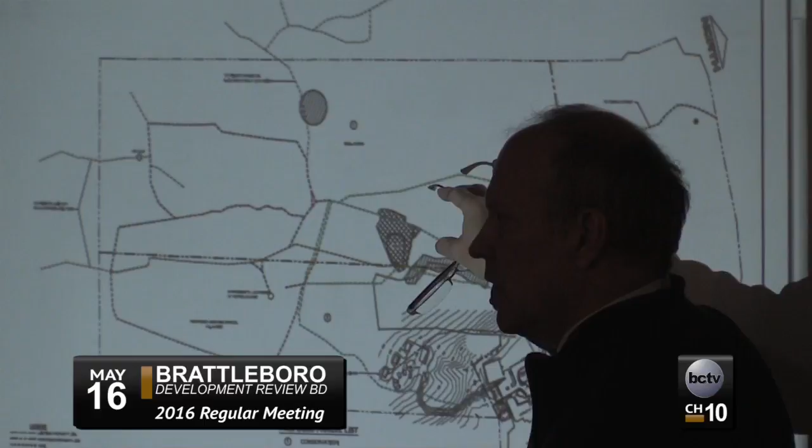If we did that, we have this designated as conservation area, about 80 acres. We may come back with a proposal to continue having at least 80 contiguous acres, but shaped like this, which would allow us to increase the ability to have more developable land here. This parcel, like the entire campus, is within New Market tax credits.

BDCC has asked us to try to reserve that for possible future development. If there is future development here, topographically and access-wise, it would come off of Maple Street. There is one existing gravel drive off of there. If there was development, we'd have to deal with the access and traffic flow issues.

That would be a pointer? It's the yellow button. I think I'm just about done with it until they start asking questions. Fair enough, I'll kill somebody with that pointer.

That's the area they just logged, right? Yes, the area that was logged is off of that road, up in here. There's been some clear cutting up there.

From the logging standpoint, we'd probably be put in within the conservation restrictions. We've been negotiating that with the town. We'd be a lot less aggressive than Austine was when they were strapped for cash near the end.

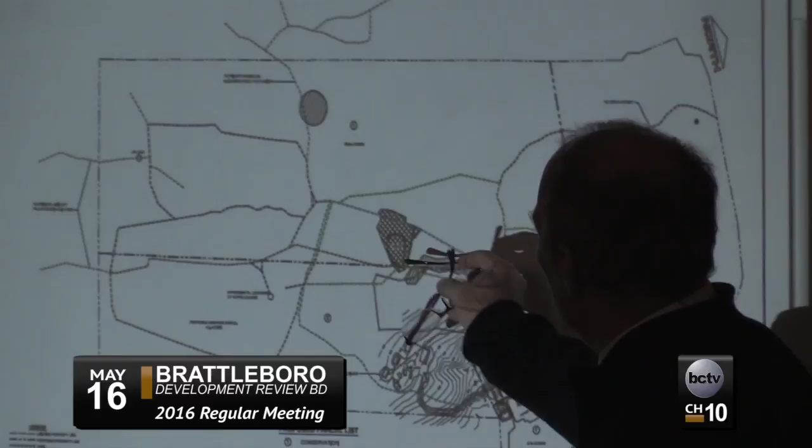The conservation area would include a pond in any event, and this is some wetlands area. To the extent that the boundaries of the conservation area versus the High Five parcel encroach on and overlap with respect to the wetlands, we would include covenants that they would not be developing in there.

The initial chore we gave SVE was to make the lines as straight as possible, since that's cheaper. So we may be gerrymandering those a bit. High Five has their existing ropes course in this area, so we need to make sure that stays within their parcel.

You also see the colored lines on here are existing trails. We would keep, our plan is to keep the trails open to the public. In the conservation area, we're going to try to make sure it does not include the ropes course, so that's clear.

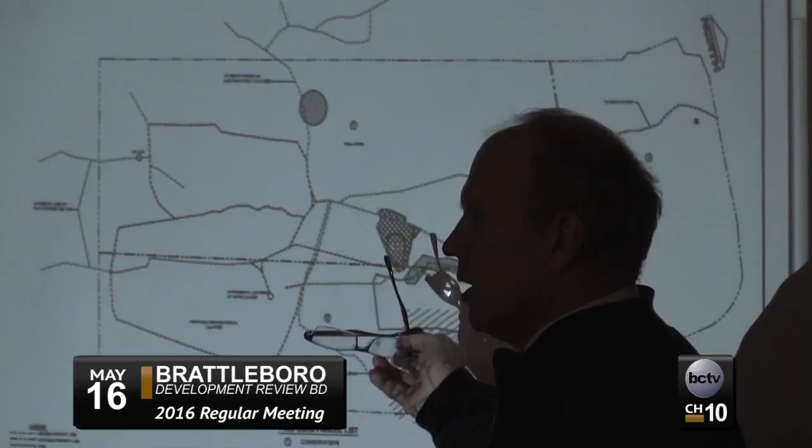The only other use we have found with respect to the conservation area, besides the open trails, has been a portion of what's the disc golf course. We're still working out whether that's going to be continued use or not, compatible with High Five.

Then there's a small area up here called Upland, which is where Hilltop Montessori, when they used to have their facility at Vermont Hall, would use once a year for an annual retreat. They still do, and our plan is to continue to allow them to do that.

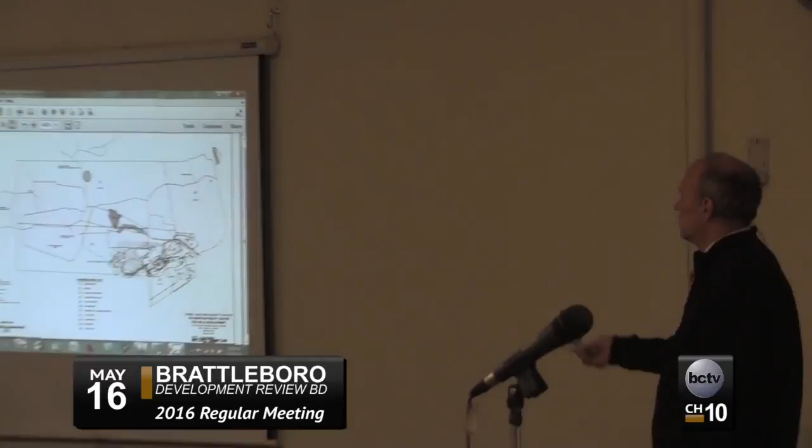The trails are open to the general public. We'll be clearly marking them alcohol, smoke-free, drug-free zones. Dogs are supposed to be leashed. Again, we'll work through the limitations that make sense for that use.

The other waivers we're asking for involve a number of conditional uses in the institutional planned unit, and we would be asking for virtually all of those. Those include different types of residential uses, either hotels, duplexes, 3-family, 4-family. That would be for Wheeler House, because that's in that area.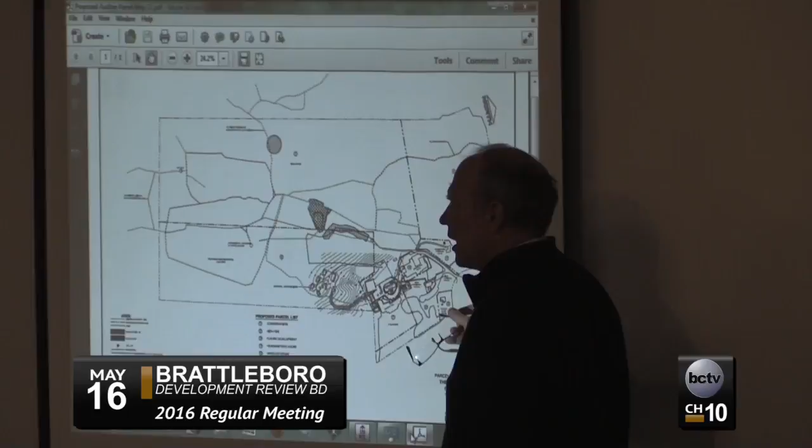That was most recently used as somewhat of a transitional housing for deaf students getting into the community. The building is a little tired at this point. It could be converted, if we find an interested landlord or possibly Windham Windsor Housing Trust, to 3 to 5 unit housing.

Vermont Hall, where Winston Prouty will be having their main facility, also includes in the upper corner the kitchen, which we're asking for clarification that we can develop into a Vermont certified food preparation facility. We have Vermont Dinners, a cooperative effort with UVM Extension, using that as a pilot project for preparing local frozen dinners. We'd like them to continue using it, but also have it available for other community groups looking to use that.

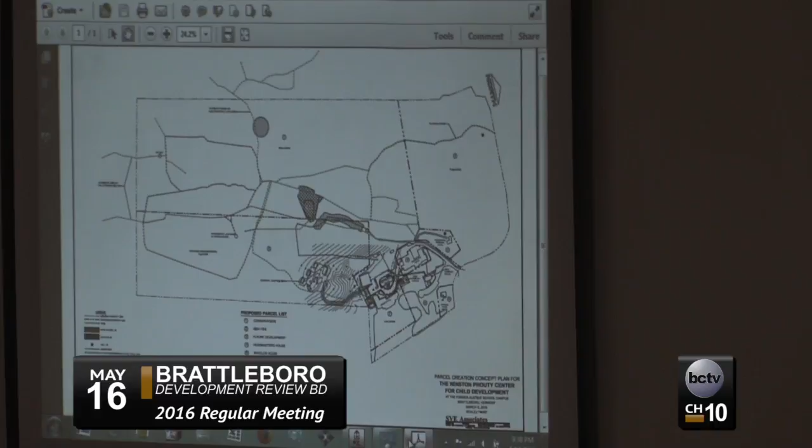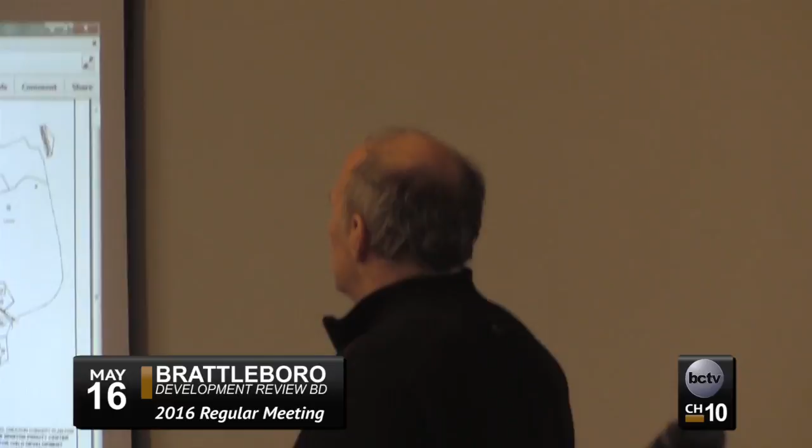I actually view that as a decrease in intensity from the perspective of the ordinances, frankly, because it did not appear in me looking through the existing issues whether any real study had ever been done or real documentation had been as to uses and parking.

We did it, and that leads a little bit into parking. We did a brief look at the regulations, and the parking count on the campus right now is 160 spaces. If we were at near capacity on the different things that would be included within the planned unit development, again leaving out these two parcels, and also not dealing with High Five because they'll add their own parking, we came up with a number that could be as high as 190 to 200 spaces.

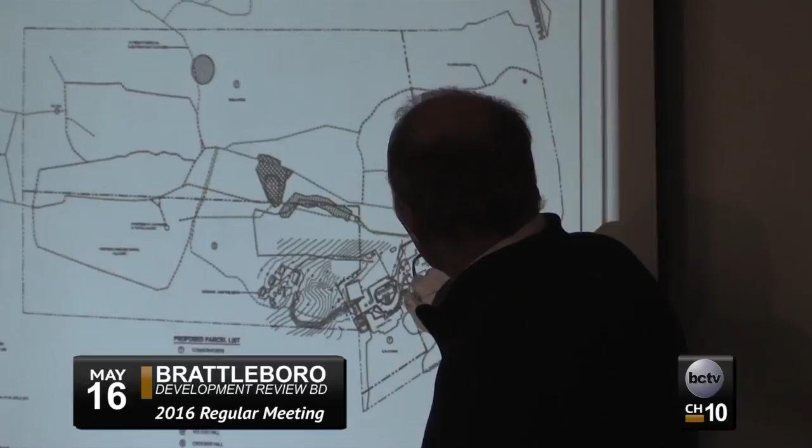We'd like to stick with our existing 160. If you are familiar with the campus, you know that this is Croker, that's the gymnasium building, and that is currently being used for Inspire School for Autism and the Garland School.

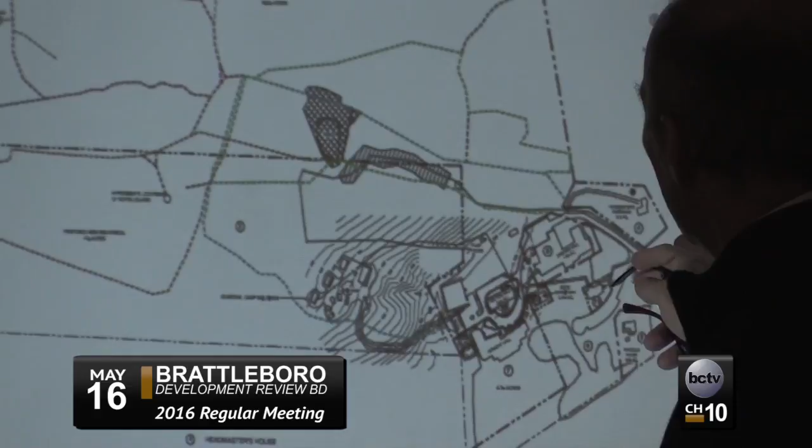That, combined with Winston Prouty, will have uses that are school-time uses, so there'll be an increase in that. Right now, no one is really utilizing the lower parking lot, so there's adequate parking if the lower parking lot is included. But there is a bit of a log jam up by Croker Hall on parking.

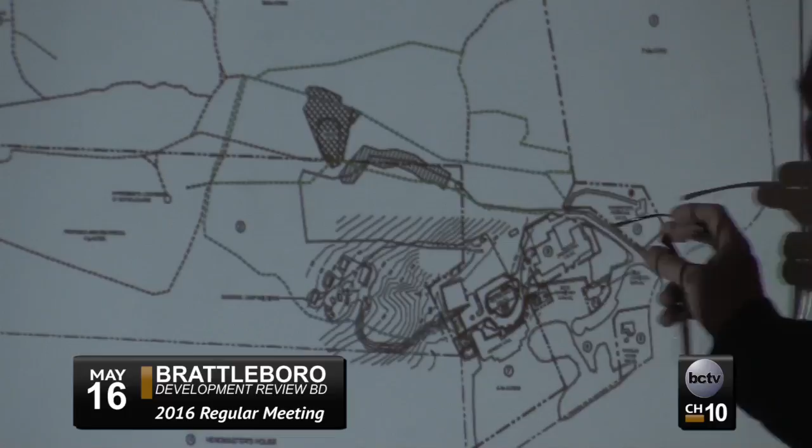So eventually what we would like to do, and whether we should include it in this master plan or not, is look to add parking there. The last time Austine came to get a change in their master plan, they had a possible parking lot up there. Again, we'd have to go through our initial analysis, and we'd have to go through stormwater to get approval of that, and we'll probably be doing that as well.

High Five is looking to build probably in this area, so when we come in, we'll probably come in at the same time with that for something with respect to that. But you are right, from the actual use right now, it's difficult to compare it apples to oranges to what Austine was using.

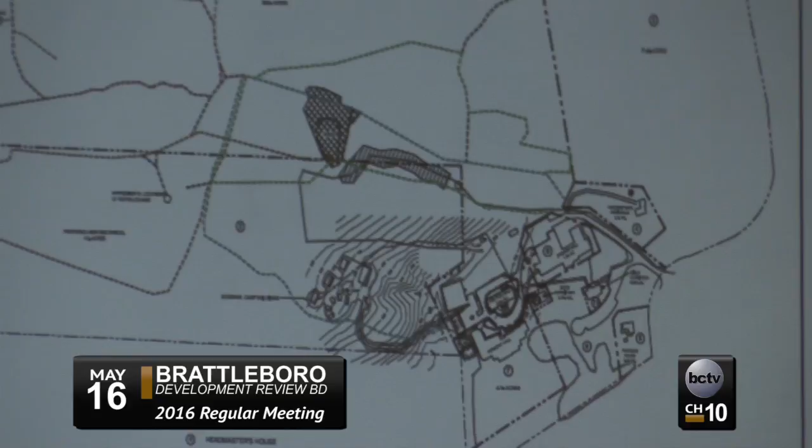But we believe that parking-wise and flow and traffic-wise, it seems a little bit less active use than that. But again, because the master plan that exists was specifically for Austine, we felt that we needed to come in, and the question became, are we going to try to amend the existing PUD? It made more sense to start from scratch.

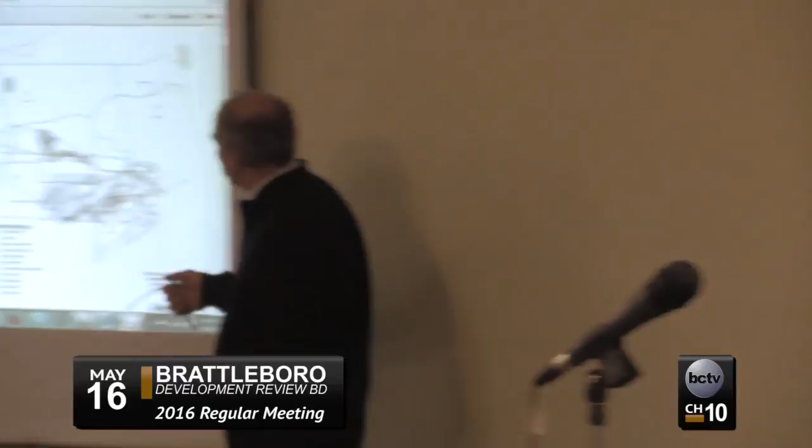So we're welcoming your input as to what you need with respect to that. And again, we're going to combine this with the plan to create a condominium regime so that different entities will own their own future. Inspire has indicated that they probably have a desire in acquiring Croker. High Five, again, they're going to be building their own separate facility, and Winston Prouty will be owning Vermont Hall. Holton Hall, we're not sure whether that's going to be owned by a nonprofit or for-profit.

The advantage of the condominium regime is it allows a little bit simpler decision-making for the listers with respect to determining what is and what is not tax exempt. We're going through that process right now. We have different opinions than they do, and the condominium regime will make that simpler for both sides.

I thought your proposal to start low and upscale if necessary would be similar to what we would want. It was hard for me because there were so many different levels of potential with each building to imagine or visualize whether 160 is right or wrong.

But it seems like a lot, and you've got the nice benefit of having more or less your own road network in there, served by a single exit. And the traffic flow works well too, because it effectively becomes one way once you're in and loops around Holton Hall, so that again we have that bottleneck at Croker, which we'll need to ideally address if the uses stay the same.

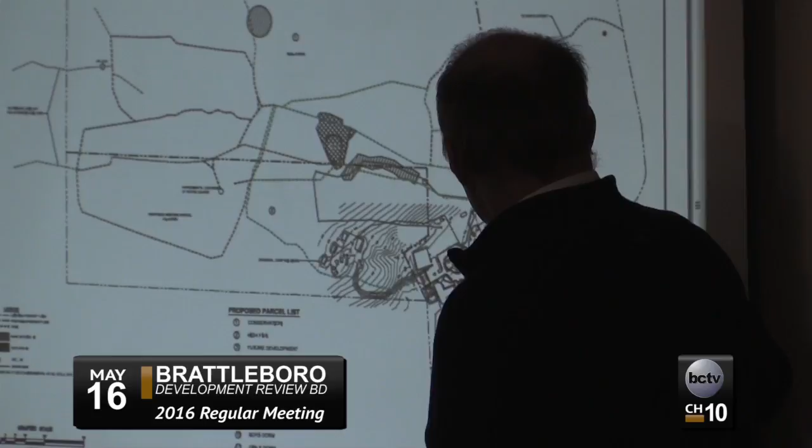There's signage here, and then there's signage on the buildings of Croker and a little bit of signage in front of Holton. Since the majority of signage, other than this, will be interior, we anticipate that we'll put more up, probably more than might be accepted on Main Street, but it'll be there for safety and traffic flow.

Did any members of the public wish to speak to this application? I know you're not really the public, but you've been here for 2 hours, so if you want to, please. We've had discussions with the parents of Winston Prouty with respect to safety and traffic concerns. The only people who've come to comment are people who want the Santa and the disc golf course. I love that Santa - it's a hallmark of my youth.

We're working on all of those. The other issue we'll want to resolve is getting some clarity on these three parcels' size. My expectation, given the nature of what that parcel is going to be for, is that we'll be very liberal in terms of what we expect for conservation use, if the numbers work. I think it should work out relatively easily.

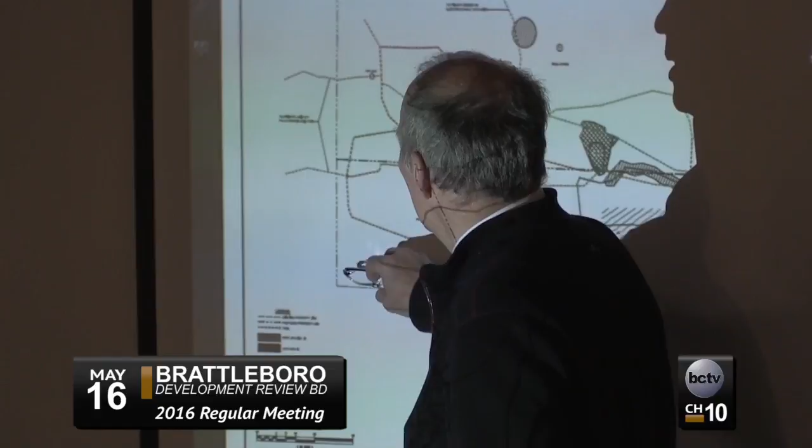It goes to the old town junkyard? Down here, in that area, it's hard for me to look at that. This is about as far as I've gone. I haven't walked over here to see, but I think there is some old logging or other roads here, and I have to go up and visit to see if we can get a better location on Upland.

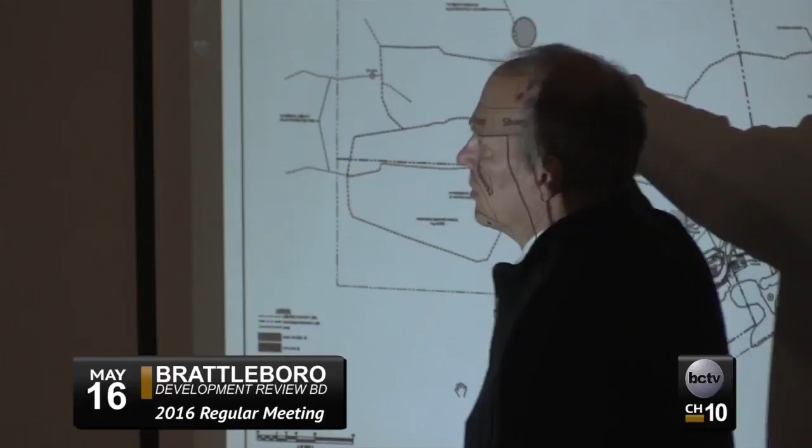So there is a road in off of Guilford Road? Yes, there's a back road in through here that cuts in. And the old plan, the last plan, dealt with about 20 acres here reserved for future residential. The reality is that the absorption rate on that is not worth it. We would rather have this area used for development because we have some parties interested, talk of possible senior assisted living there.

Just so I can keep walking. Oh, yes.

Any further comments by members of the board? Well, I just know that the highlight of Eric's Christmas season is putting up that Santa Claus - it's cold when it goes up and it's cold when it comes down. Well, if you want to come back for another review, we're happy to entertain you.

I'd suggest that I'm going to spend some time with Brian taking into account those issues and any issues he has, because this whole project was like trying to put a jigsaw together in a wind tunnel. With respect to setting out a master plan and a subdivision, although it's a lot of pieces, I think we can get our hands around them if we go in steps and get some input back, for example, on parking.

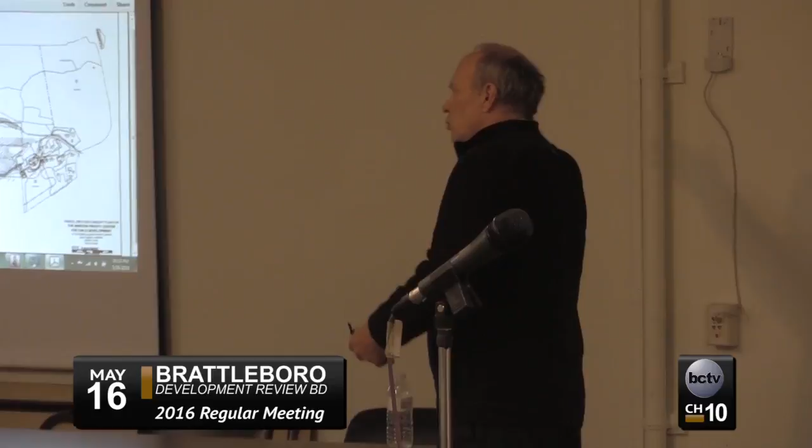When do you want us to come back? If we're at a lease-up rate, a use rate, what's the easiest way to measure that makes sense? We'd suggest a lease rate because that's easy for us to judge - it would be based on occupancy as opposed to trying to staff. Yeah, oh, I get it.

I just want to remind you that just because you're at what might seem a final phase of application, with a project this big, it's not unprecedented for us to continue it so the applicant can deal with something. Understood, and that was also one reason why, as incomplete as it may be, we wanted to get here as early as possible.

Winston Prouty plans on being in there in July. Right, we've got our permits in place. It's going to be a marvelous facility, and we're really excited about it.

Okay, well, thanks for your time. We're happy to help in any way we can. Brian's a great resource - it's easier to call him than to call us all on a conference line, you know? Yep, thank you, we'll work it out. Thanks for staying. Nice to see you all.